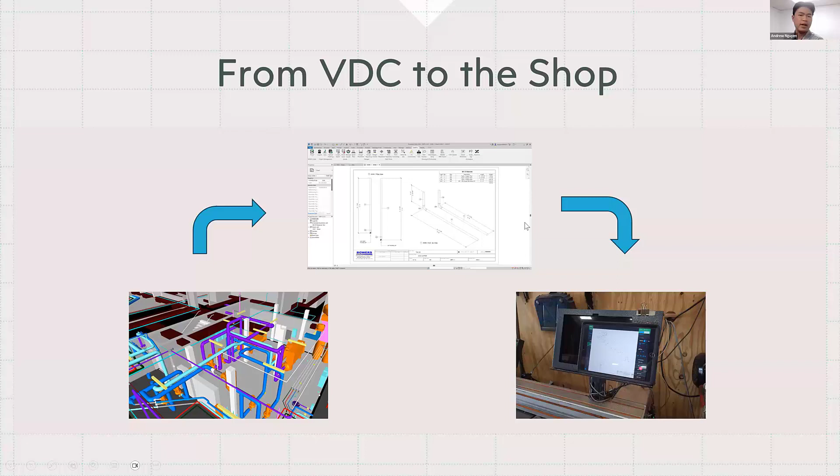I'm going to pause there. If anybody has any questions, feel free to ask. If not, I'm going to go over the more technical side of what is out. Yep. Doesn't look like we have any questions yet. Okay. Sounds good.

Like I said earlier, we use MSuite. They're basically a production management software that manages what is being pushed through our fabrication shops. They start off with our BIM team, our spooling department, and then once it gets to the shop, we can track every assembly through a workflow stage process where we know when things get cut, get assembled, and get QC'd or shipped out.

But this isn't the only option that you have. MSuite does stuff with Revit and the fab shop managers, but there are other companies out there that give amazing tools to make life and quality of life for your BIM department and VDC team easier. There are about 15 different software companies, including the ones you see on screen here, that you can leverage to efficiently transfer that workflow as seamlessly as possible.

So next up, from my own company, SmithGroup, an awesome presentation with Dafeng and Dongyeop. How are you guys doing today? Doing well, thank you. Thank you. It's very wonderful to have you guys today. I will say I have seen this presentation, and I'm even excited to see it again. It's a very interesting presentation. So I see your slide. You guys are good to go.

Okay, great. Thank you, Dana, and everyone who joined the meeting today. I'm Dongyeop Lee, and I'm with Dafeng Kai to present the U.S. Coast Guard Maritime Center of Excellence project. Dafeng was the project architect, and I was the project designer. We will focus on how parametric design workflows were utilized for the building enclosure of the project from the initial design concept phase through project completion. Without much ado, Dafeng will start with site context.

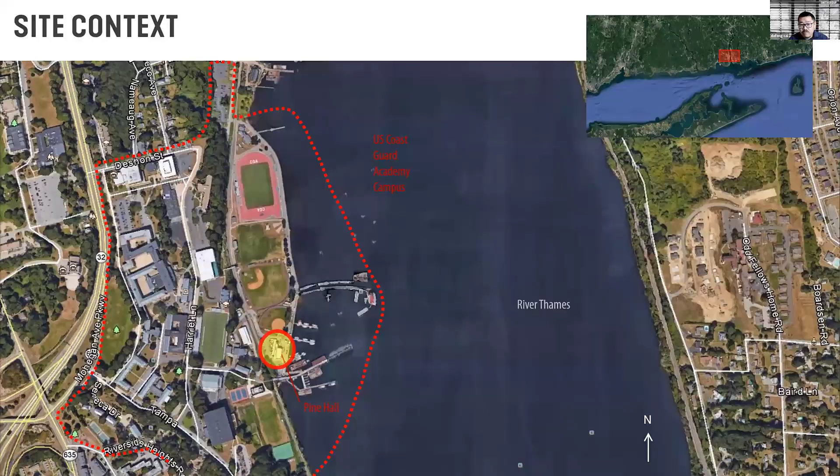The main body of the building is oriented due north because the North Star has a very special meaning for the Coast Guard. On the ground level, there's a double height boat shop on the backside, a science and engineering lab, and multiple labs and shops for the waterfront operation. The ground level is angled to respond to the site, the driveway, and the waterfront bank, creating a sense of arrival and helping anchor the building to the site.

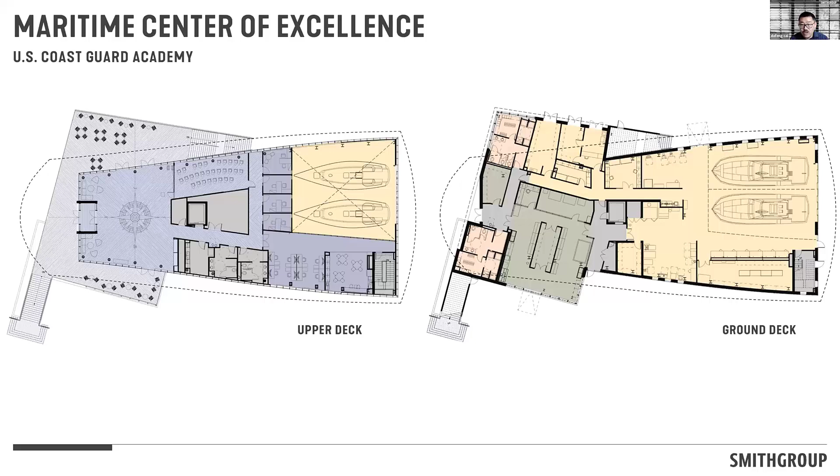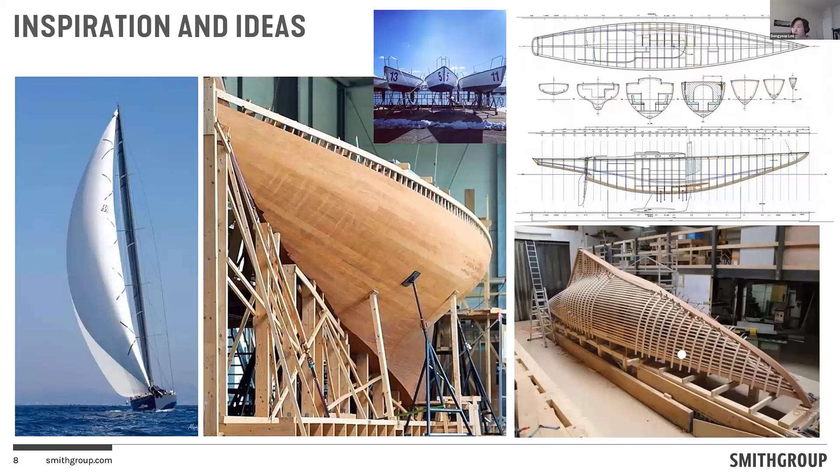The design of the project was inspired by the sleek hulls and vessels under full sail, which represent the maritime heritage of the Academy. From the very beginning, we used Rhino and Grasshopper to explore various design options with hydrodynamic geometries. Every project has a limited budget, and this project was no exception. We had to come up with the idea of creating a unique and iconic design for the campus based on simple geometries.

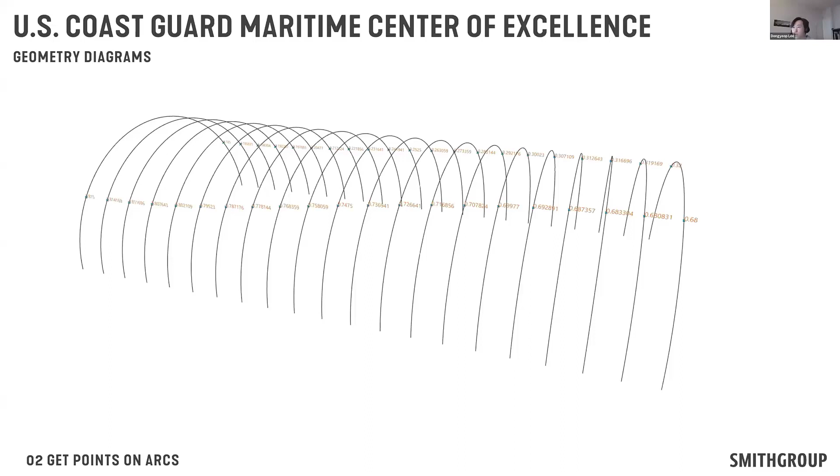The curves were created by connecting these points on arcs. They were then used to trim a barrel vault roof surface. So the trimmed barrel vault surface was the main driver to create the building enclosure geometry. So it might look complicated, but it is actually based on very simple geometry.

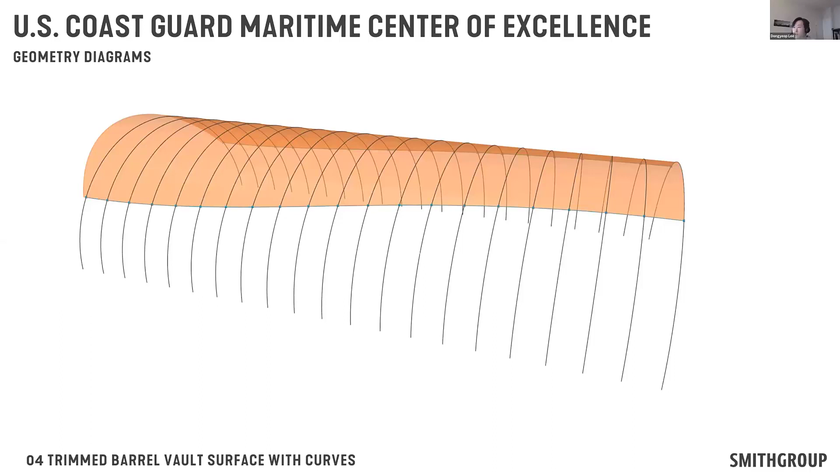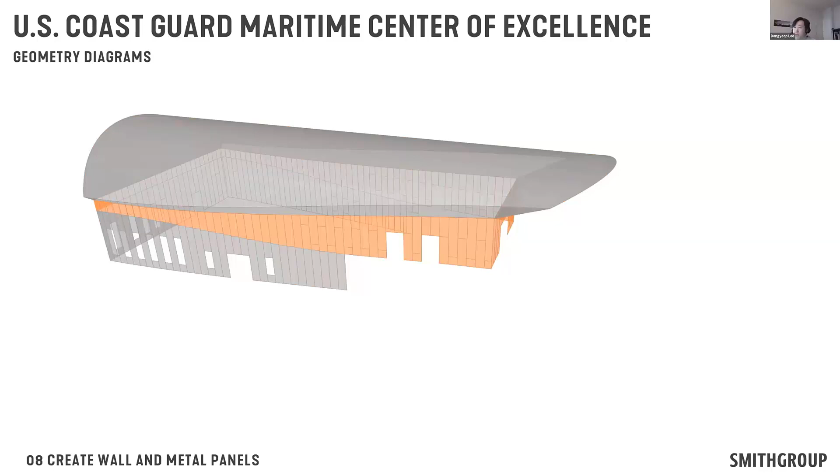So these curves were offset to form soffit surfaces, and then we trimmed these surfaces at north and south, which are shown on the right and left side, respectively, on this image. We projected the bottom surfaces to the ground to create wall surfaces. We then divided those wall surfaces into two parts, the glass panels above and metal panels below.

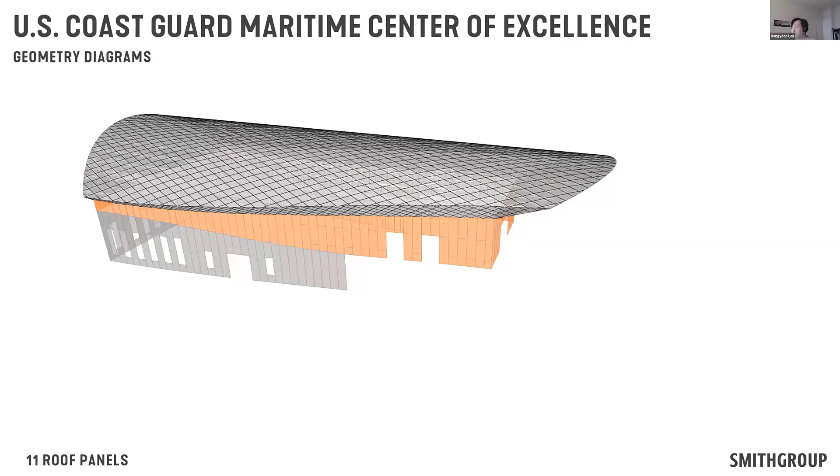We created the glulam roof beams following the roof geometry, and we filled the space between the roof beams with the ceiling planks. And finally, we created roof panels covering the whole roof geometry. The entire building enclosure, with the exception of the deck at the north, was controlled by a Grasshopper definition, as shown in this image.

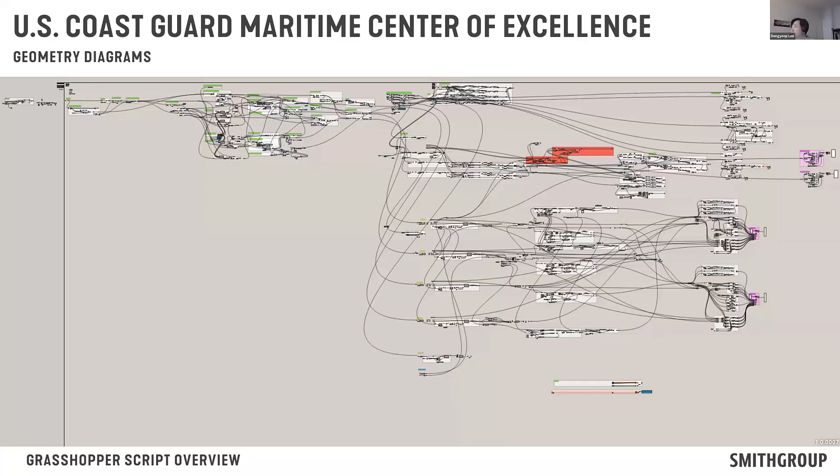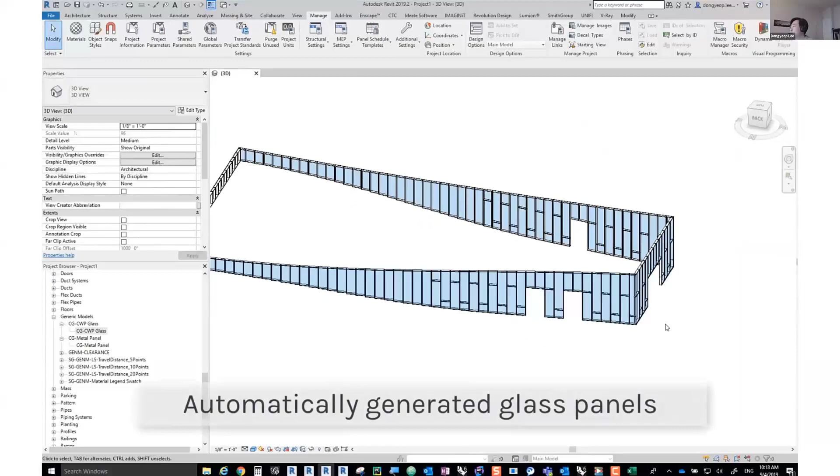The project was documented before Rhino.Inside.Revit came out. So we developed a custom transfer process from Grasshopper to Revit using Excel and Dynamo. I'm not sure there's a lag to play this video, but this video demonstrates how glass and metal panels were automatically generated in Revit by reading the Excel data.

Grasshopper was the main application for controlling the building enclosure design. The geometry was then transferred to SketchUp for visualization and communication within the project team. And the same geometry was transferred to Revit for the documentation by Dynamo and Excel. And right now, Rhino.Inside.Revit came out, so the process is simpler than this.

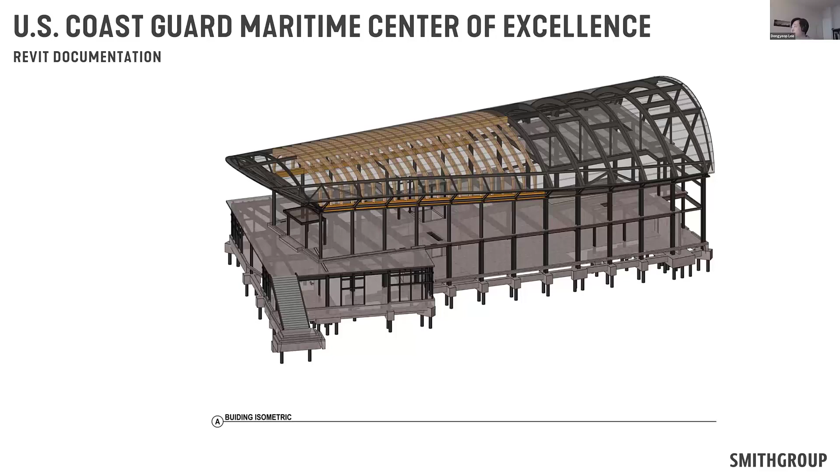The structural engineer successfully created frames based on the roof surface we provided. However, we had to model exposed glulam beams for the documentation. Those beams were transferred from Grasshopper to Revit automatically using the same method shown in the previous video. The work points were critical to describe the geometry of curtain wall panels. All these work points were also automatically transferred from Grasshopper to Revit.

Additionally, tagging was automated by running a Dynamo Player script. If you're trying to manually add these tags, and we had to kind of iterate this process. We had to optimize the design, and we had to iterate the documenting process multiple times. So automating these workflows was very helpful for us to optimize the design.

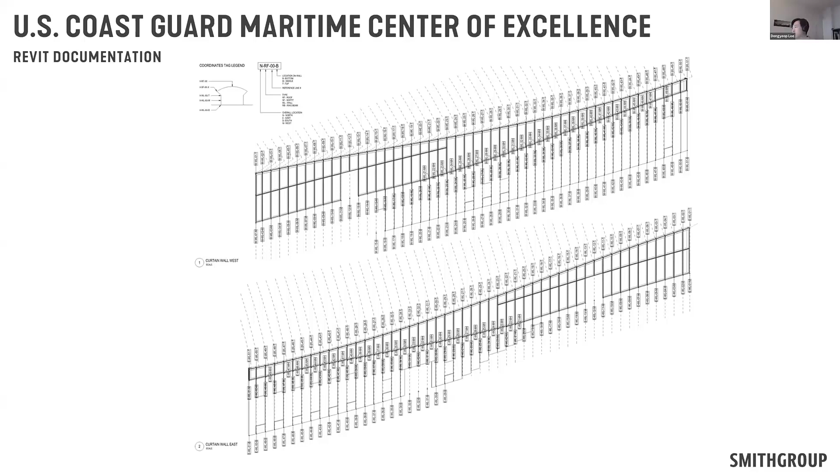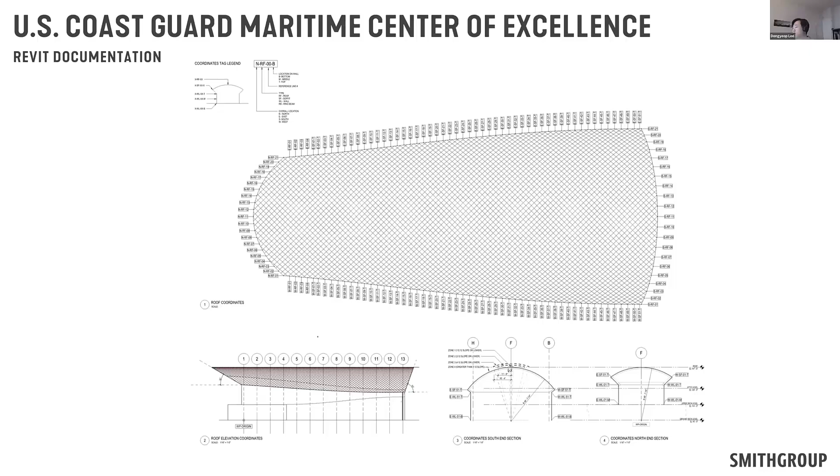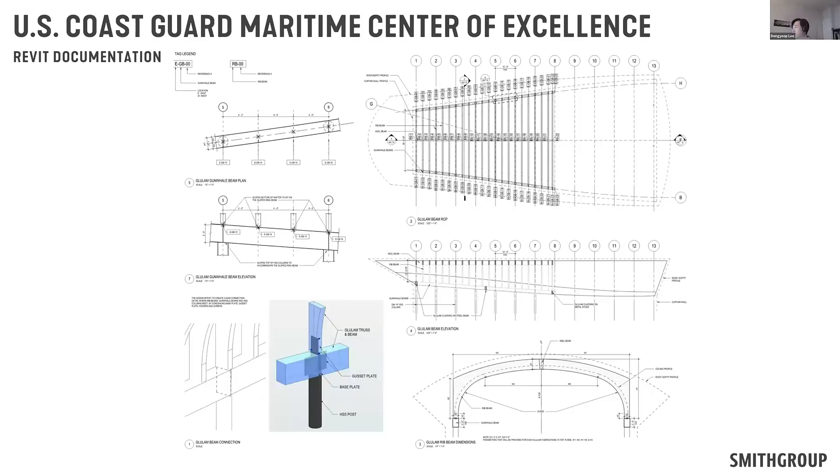The work points were also used for the roof geometry, and they were set at an interval of 3 feet for the north and south axis. The project team coordinated with the glulam fabricator to decide how to set up work points and parameters for glulam beams. We spent a good amount of time documenting glulam beams to minimize any potential construction issues.

Actually the most complex surfaces were soffit surfaces because they are double curvature surfaces. But we checked the deviation from flat planes, and they were all within the tolerance.

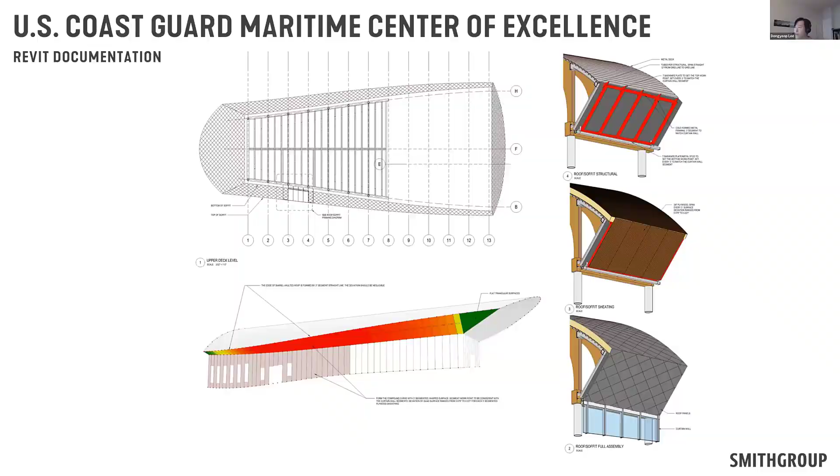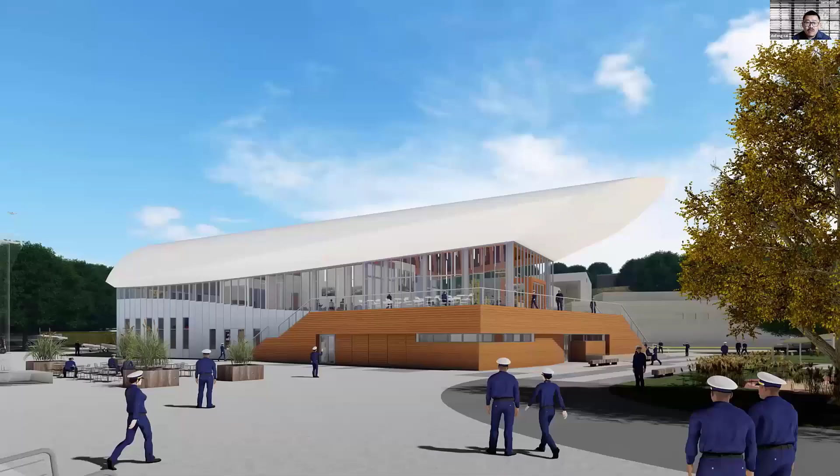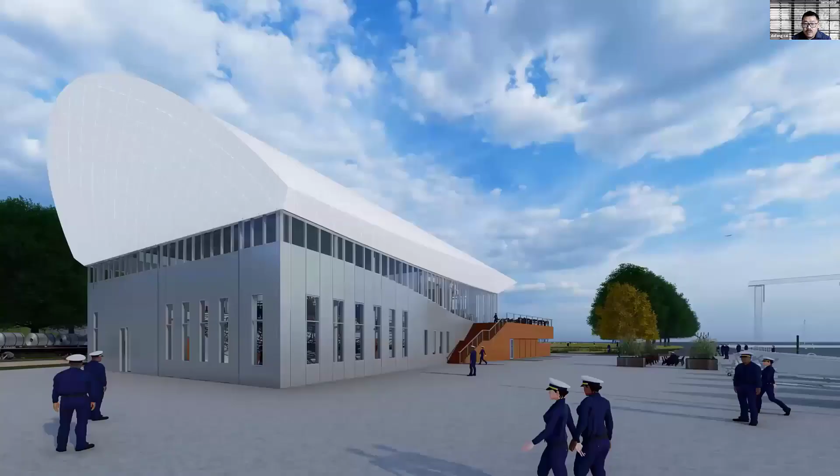So I just want to very quickly go over all the renderings we have. So this is the building you see from the waterfront. And this is from the waterfront access, you see the building. And this is you coming from the campus across the railroad, you're gonna see the building and the main stairs. And this is the backside of the building where we have this double height boat shop maintenance shop.

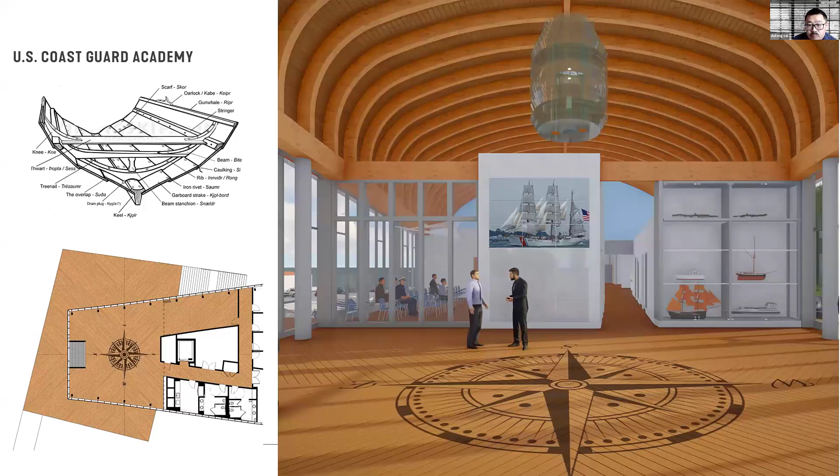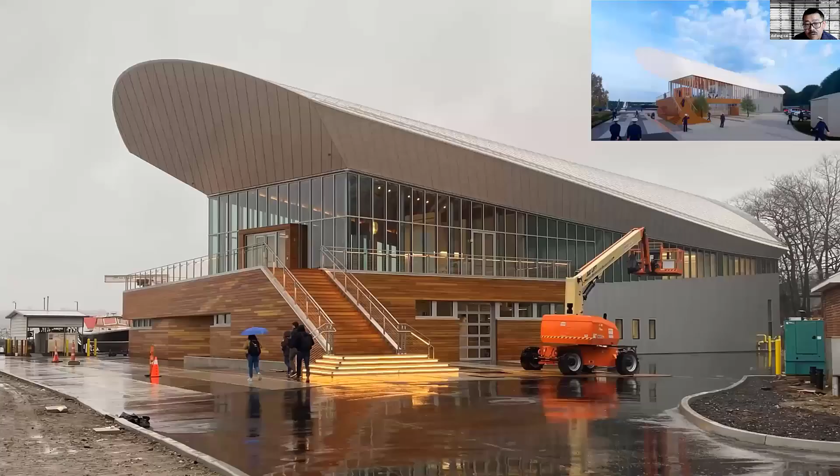And next slides, this was taken early this year, February, when we went on site and saw all the lighting installed and tested on site. I tried to pair the photos I took during February with the renderings we showed, so you can see the consistency between the design and the final products.

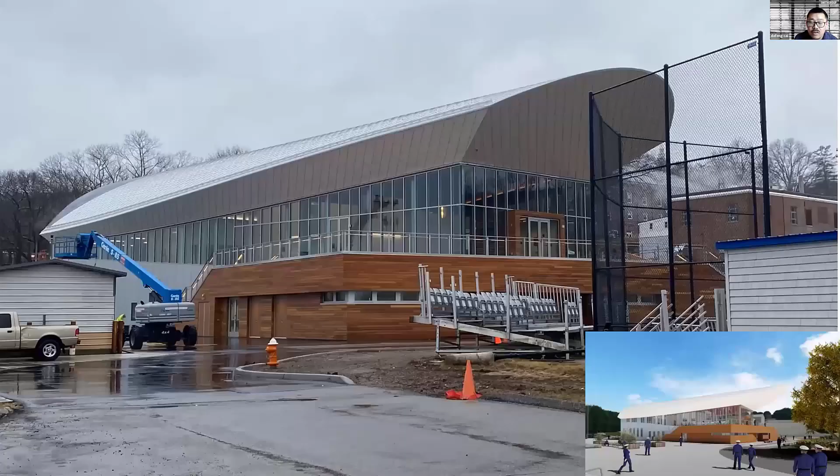So this is again coming from the campus across the railroad. And the next one showing it with the lighting on that day. The next is showing where you access the building from the waterfront. And again, with the lighting on.

And I want to pause here a little bit because, from the drawing to the finished product, as architects we mostly rely on the submittal review to control the process and make sure the design was properly executed on site. But this project is especially unique because of all this parametric design process. So even though we brought the contractor on board during the design phase and talked through all the design intent, carrying that intent into reality is a challenge at a very different level, right?

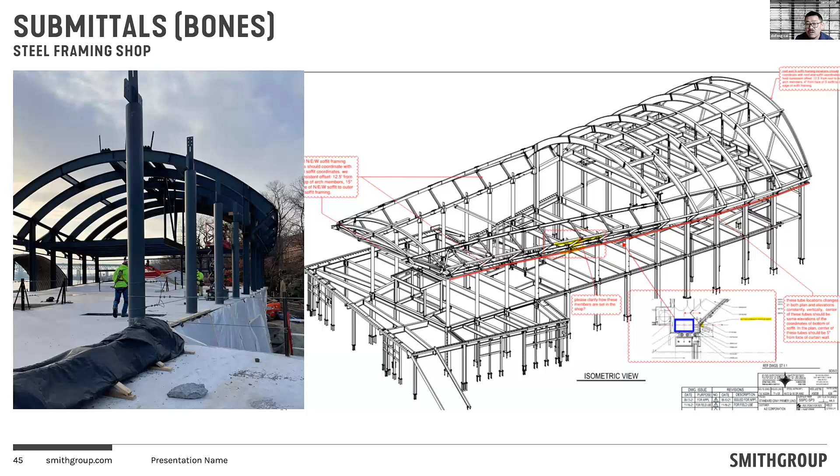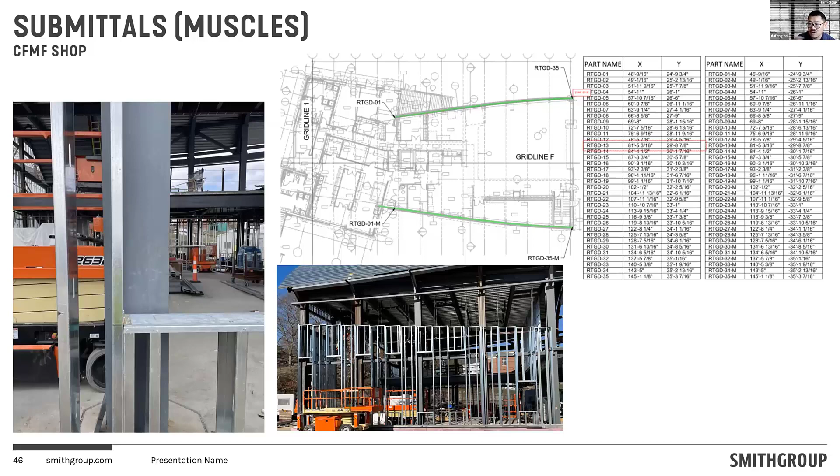And next slide, it's the same thing. We also rely on cold-formed metal framing to form this compound curve on the soffit. So, based on our details, we have to pick certain key points, and then the contractor can use those key points and set up XYZ coordinates. Then we can compare their coordinates with our data points in the documentation to make sure everything is consistent with our design.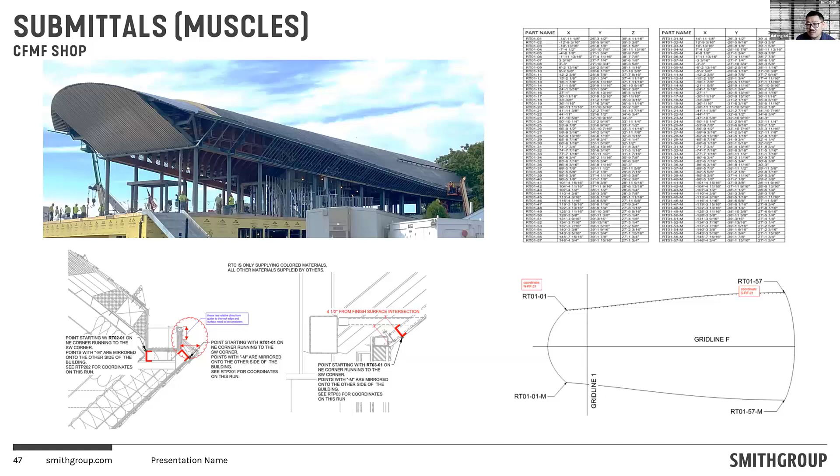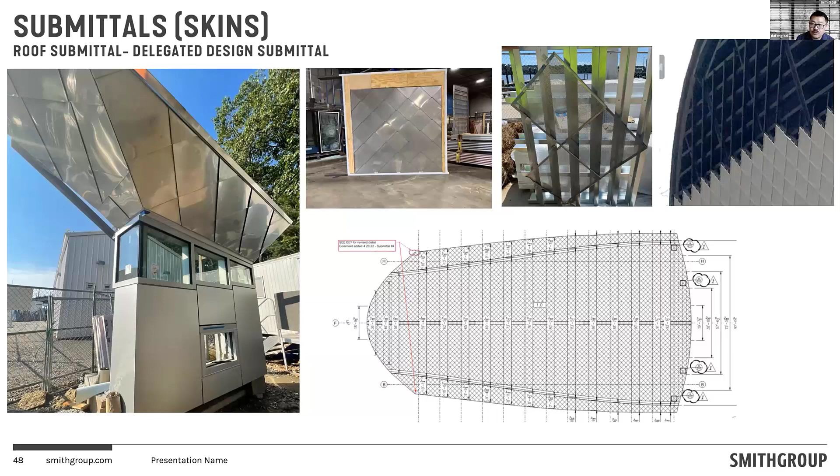And the third category of submittal, I would think, is the skin, right? Because now you've gotten to the finished products of the project, and you want to make sure everything comes together nicely. Like most projects, we do this mock-up to make sure all the details look right and everything comes together nicely before we apply all these things to the real building. And there's a lot of detail at this level you need to pay attention to.

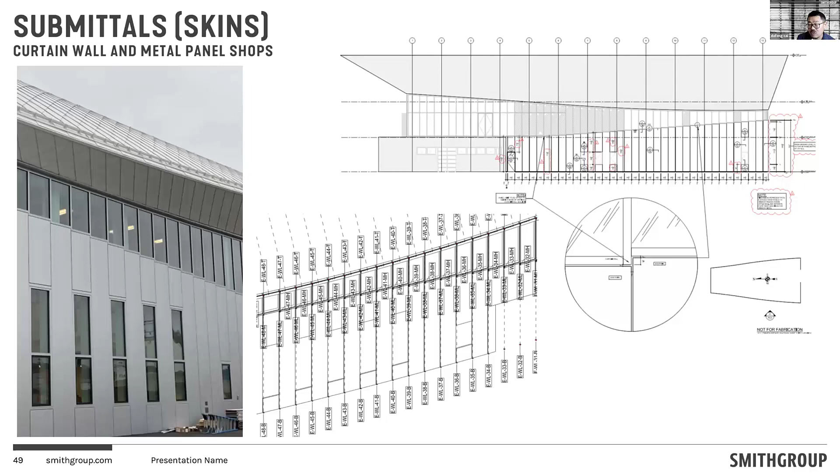For example, for this project, we have the sill of the curtain wall continuously stepping down to form the curve along the building facade. And then you need to think, okay, the reveal of the metal panel cannot be aligned with the center of the curtain wall, otherwise people cannot construct it. So we have to make sure all those reveals align with one side of the mullion so you can make every detail constructible.

And again, on the roof, you need a gutter, so how can we conceal the gutter nicely and follow the geometry of the roof curve? And there's going to be a snow guard and a snow rail, and you can see from the photos the snow rail follows the geometry with a similar segment. And the snow pads are barely visible in the photo because they all align at one point of the diamond shape of the roof tile.

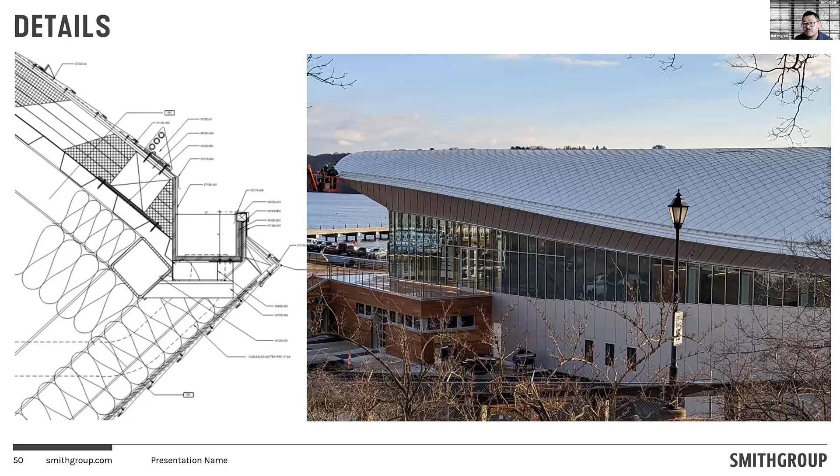And last but not least, of course, the lighting is very important for this project. How you can detail the lighting, given certain surfaces, so it can be mounted without conflicting with the building geometry, and how you can conceal it at both top and bottom, making the lighting complementary to the building geometry but not conflicting with it.

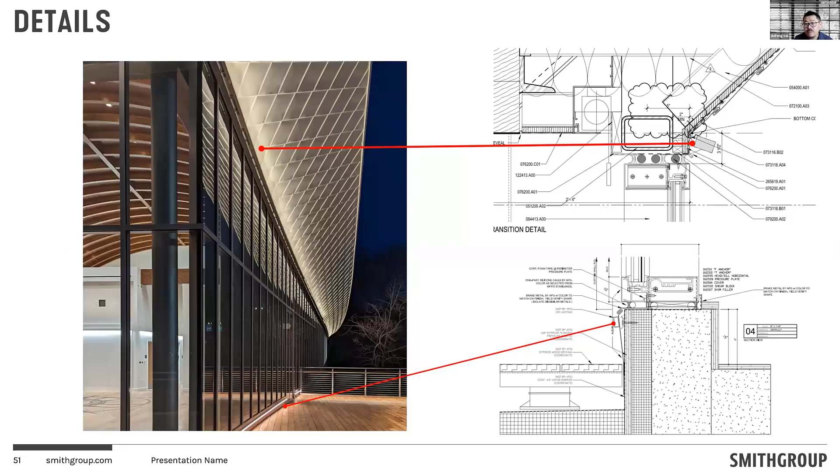And with that, I think that's the whole presentation we have. Well, I'll say that you're definitely getting a lot of compliments on how beautiful it is.

It's so crazy how the real photos look like renderings, right? I mean, they don't look like you plopped a tractor in and photoshopped it in. It looks just absolutely stunning.

Can you talk a bit about how you translated the geometry over to the fabricators in terms of the roof panels and things like that? Did you share the actual models? Were they getting the Rhino, the Revit, those types of things? How are you translating that to them outside of the shop drawings?

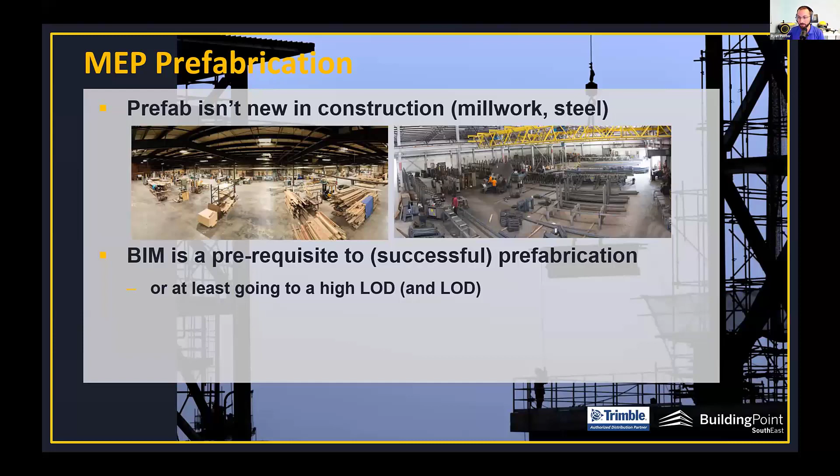So the definition is just the practice of assembling components of a structure in a factory or other manufacturing site, and transporting complete assemblies or sub-assemblies to the construction site. I put a few different visuals around this to show you — you don't have to do modular, you don't even have to do skidding and racking, like Andrew was talking about earlier. You can just start with spooling. These sub-assemblies aren't huge, but they're easy to start from.

And like Andrew said earlier, the technology really lends itself to enabling a lot of this. There's a lot more — when you start going to a higher level of detail in your models and drawings, you can start extracting a lot more value, even beyond the spatial coordination of it.

So skidding, in the middle there, is typically MEP only — if it's in an MEP room, this benefits it where you can just take a lot of stuff, put it on a skid, and drive it into a building. I've seen these things lifted into buildings using heavy duty cranes. And racking on the right is kind of multi-trade racking — that's probably the most complex one, because you're actually starting to think about this coordination effort in the shop.

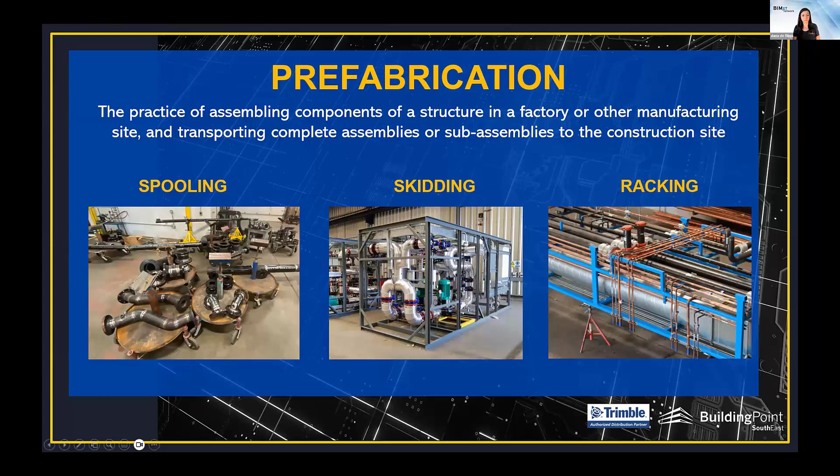That's actually what we had our last round of local meetings on, Atrium Health and their racks that they did for a hospital project, as I mentioned. So we may get that one online and recorded. But can you talk to another project you've worked with or seen that used this? Yeah, there's one right here.

This was a project we did with some team members, or board members at Clancy - shout out to Zach, he was the BIM coordinator on this one. I was doing modeling for Warwick Mechanical Group. They actually sent me a plaque - this was the Hampton Virginia Aquaplex, over there by the coast. We kind of went through all the coordination.

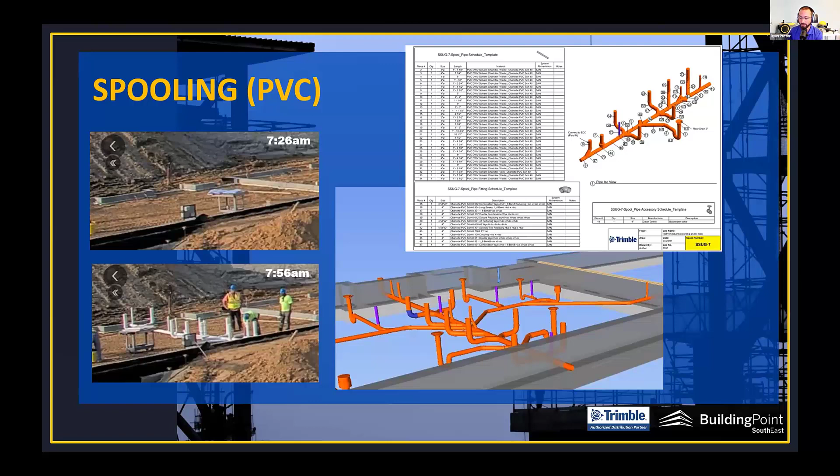But all that to say, that's just PVC - PVC is easy to work with, it's bigger in size, but there's still benefits. A lot of people probably wouldn't start with PVC as a piping contractor - you'd probably do something more like this, spooling of steel pipe inside of a mechanical room.

So this project was the same sub, Warwick. The GC was the other one - it's on the tip of my tongue, I'll get it later. But anyway, similar process.

Can't remember - I think we are kind of a Trimble house, so we specifically use SysQue for most of our projects. You can see the level of detail we go to on the modeling side, even showing the exact thickness of that weld and leaving a gap, and all that, really collaborating.

That's one huge part of the process, collaborating between the office and the field side and really saying, hey, what are we doing here? What do you prefer? There's different options, or hey, that's not going to work - we've got a certain head height, we've got a certain suction distance we need off a pump. You really got to delve into the details of the submittals to make sure all the T's are being crossed and the I's are dotted.

In the center there, you can kind of see that was early stages of - going back to my AR presentation - overlaying digital geometry on top of the real world.

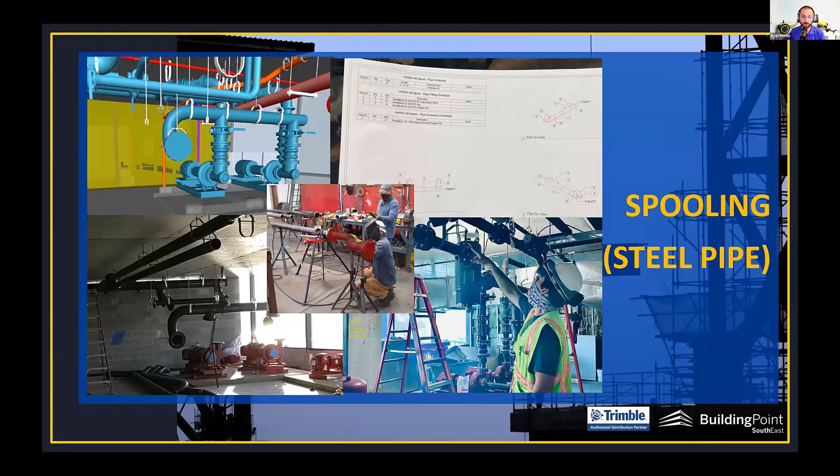So kind of getting a little bit into the benefits, obviously one of the biggest benefits is cost for a trade partner. You just kind of look at hangers, right? I mean, even if you just started spooling your hangers, I think that's a great starting off point. And then obviously you can use different things like total stations to put the hangers in the deck beforehand, and all these different things that are becoming commonplace in the market.

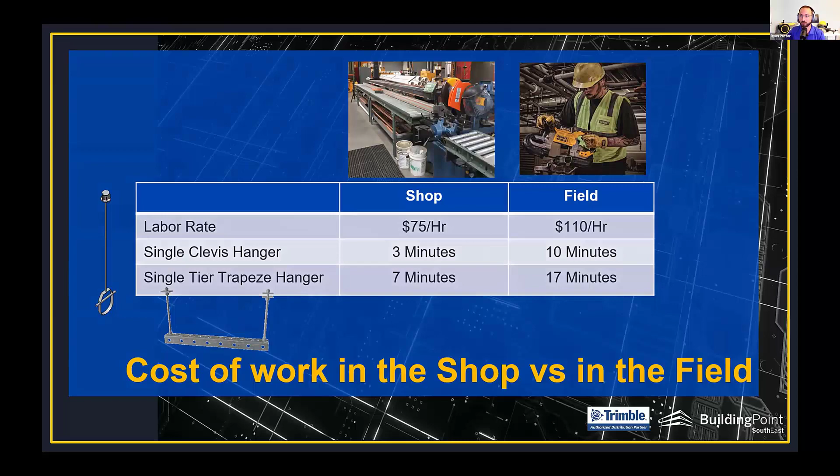But just looking at the figures there, depending on job size, you're going to start saving probably tens of thousands of dollars on a big enough project. And the added benefits of safer working conditions. So fewer ladders, less drilling, less work overhead. There's a lot of exoskeleton things, which are cool, but it's like, well, what if we just took a lot of that work into the prefab shop and kind of avoided that exposure?

More productive, obviously, you're in a controlled environment. You see exposure to weather there, the heat, especially here in the Southeast. It gets hot in a lot of places of the country, a lot of places it gets cold, all those things. So it really brings it into a controlled environment, where people are more productive. And then certainty to the schedule. Like I said, on that one, we were able to not have any schedule impacts due to the fact that a lot of things were already done.

You basically just have these weld points in the field for the steel pipe, and then for the PVC, those are a little bit easier to go along. And then reduction of waste on the construction site. If you've never been to a construction site and you're on the design side, I highly encourage you to just go walk a construction site. You'll be surprised. Things get lost, things get mangled, but a lot of times, if you have a good enough plan, you can reduce a lot of these wasted materials on site as well. And then obviously improve quality.

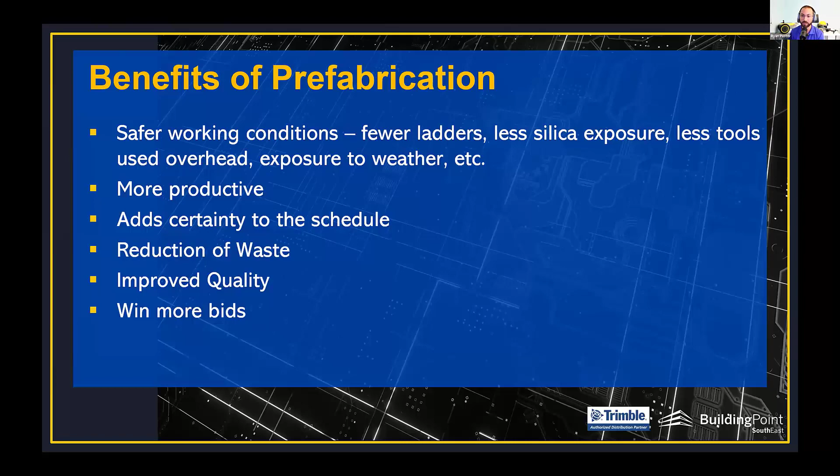And then at the end of the day, you're winning more bids, winning more work and being more profitable. So just like Andrew had, I've got a ton of options. I put them in the mural there as well. Just saying, hey, there's tons of options out there. None of them are perfect, like he said as well. We rep Trimble, and I know we're not perfect. It really just depends on what trade you're doing. Some are stronger in certain trades than others.

But I put plugins because really a lot of them are based around the Autodesk authoring suite of AutoCAD, which is translating more now to Revit. There's others out there on the authoring side, but at least here in the States, a lot of what we see are just plugins to Revit as an authoring tool. And then just a couple of these animations.

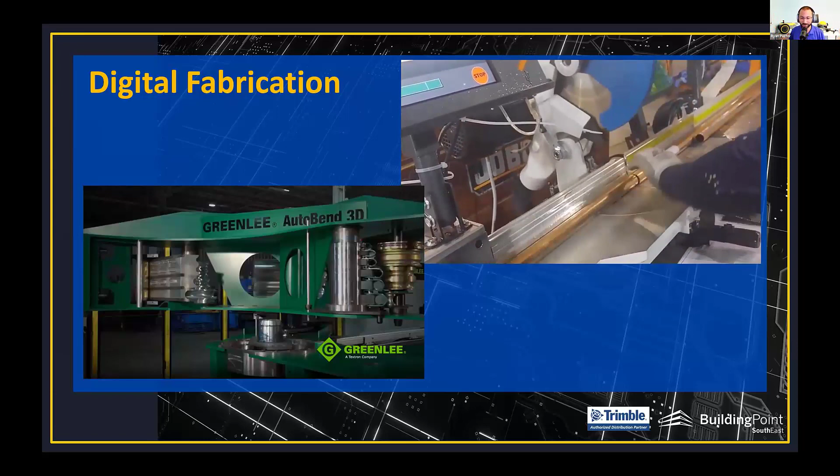I think he talked about the TigerStop. This is just an animation of what the TigerStop is. So you have all this I in BIM, right? That used to be a buzzword. Now we have new buzzwords like digital twin. But this is kind of the I in BIM come to life, right? Where you have all this information that's in the model.

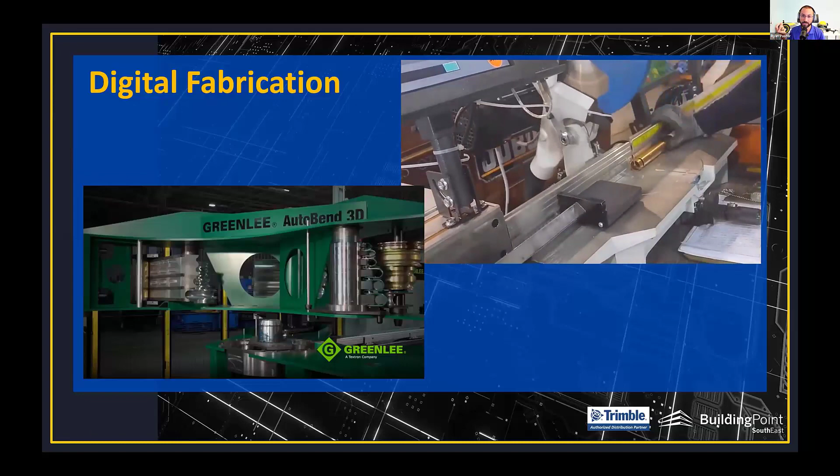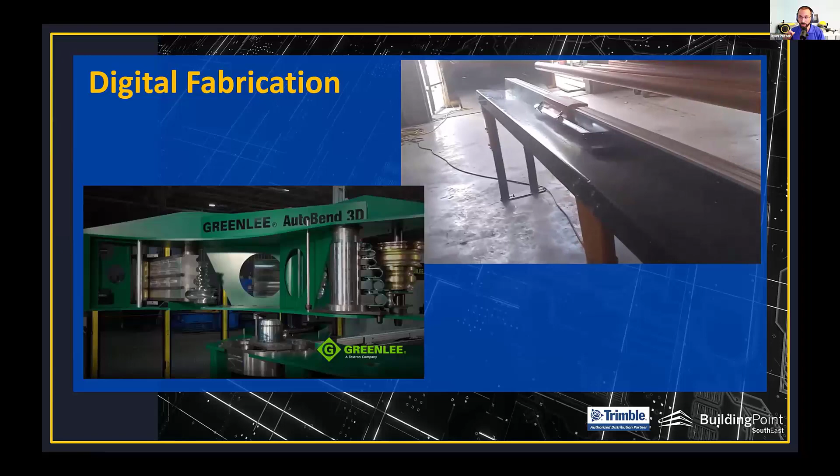And you can see that cut end right there. That's your waste. So it kind of goes through and all the algorithms can crunch the numbers. You can put your pipe length in there and it can say, okay, cut this one to this one. And then you're putting specific stickers on there to essentially show, hey, this is where this part and piece goes.

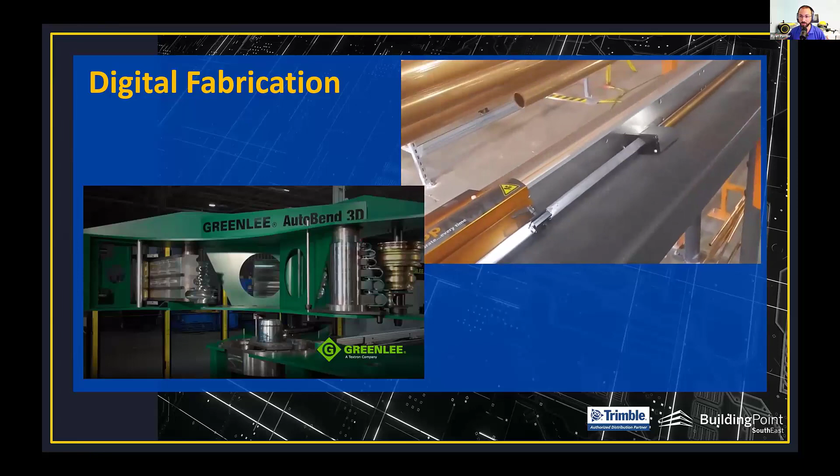And then you can start wrapping those in kits and delivering them to the site, as you show there. So you don't even have to be spooling to do something like this. You can still just take the information from the BIM and do something like that.

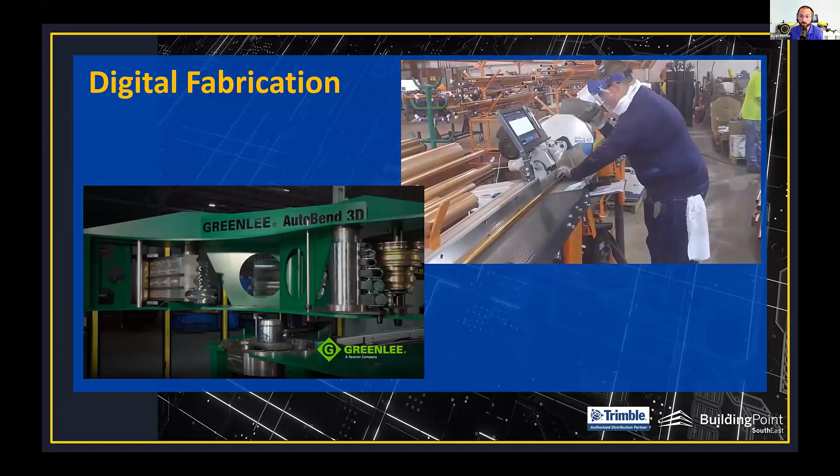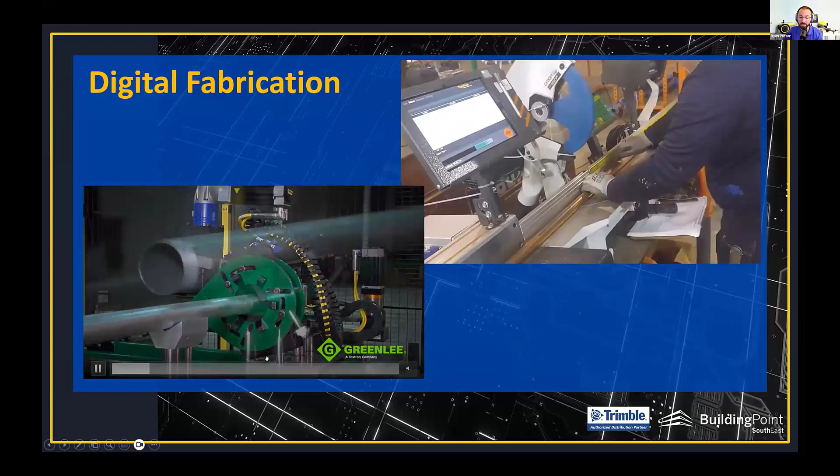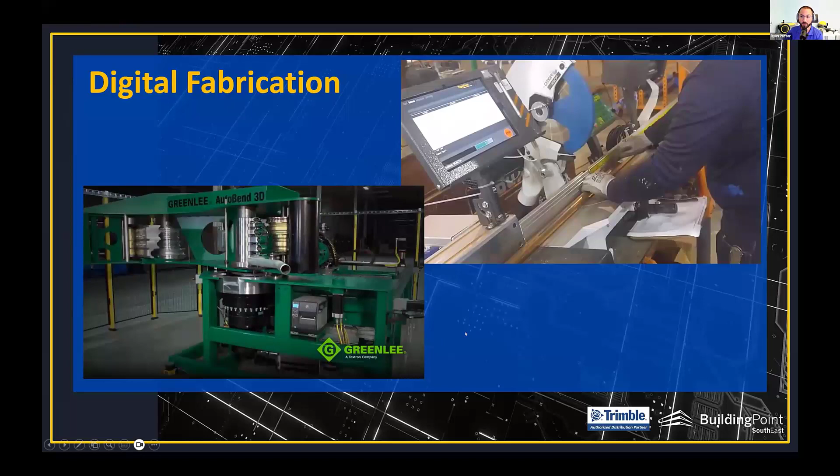And then for the electrical folks, there we go. Just automatic benders of pipe, conduit, different things like that, where you really can take the guesswork out of it and really enable your teams to be set up for success. So that's all I got.

Looks like there's a few questions regarding the relationship that you had with the A&E, architects, MEP, those types of people within the scope. Yeah. So a lot of the contracting methods, I think, were not design-build. A lot of what we did as a third party is more like a design assist.

It really depended more on the relationship. And I think Dan Morin has a whole presentation about this. I think he did it at a Clemson BIM symposium one time. Don't ignore the contracting method, but as long as you have a good relationship with the teams, that's really what it's all about. And showing that you give a crap and you want to do something with excellence. As long as everybody's really striving for that, that's the goal.

And I've never really been a part of a project that has had true co-authoring, from design down to the MEP side. Those are usually for bigger projects. So I haven't had that opportunity, but knowing that exists, there's definitely a lot of benefit to working together.